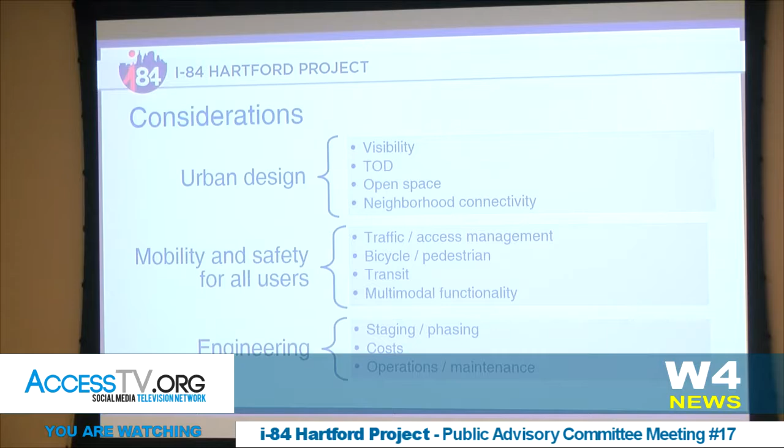So I'm going to invite the panel to come up now - David, Bill, Gina as well. Our panel is David Spillane coming up here from Goody Clancy. He's on the DOT team, our lead urban designer. Bill Kenworthy behind him from HOK is urban designer for the city of Hartford. And then Gina from TranSystems is the lead transportation planner on the station effort. So David, do we have those mics?

David, I'm going to let you explain some of the urban design considerations we've used to evaluate these stations. So as we're thinking about the station, there were really 4 urban design considerations. The first spoke to visibility - that the station was located in a place that was prominent, visible from major public streets, emphasizing its importance and significance as an important transportation facility, with good access for the public. The second was the relationship between the station and transit-oriented development, which will be an important part of rebuilding the urban fabric in the project area that connects the two sides of the highway.

The third part really related to open space, and I think this is an important ingredient of what happens in this area, which we've talked relatively little about. It's one of the more likely uses for the land over the highway cap, which has significant constraints or cost implications in terms of building on that cap. So that's a likely use of the capped area.

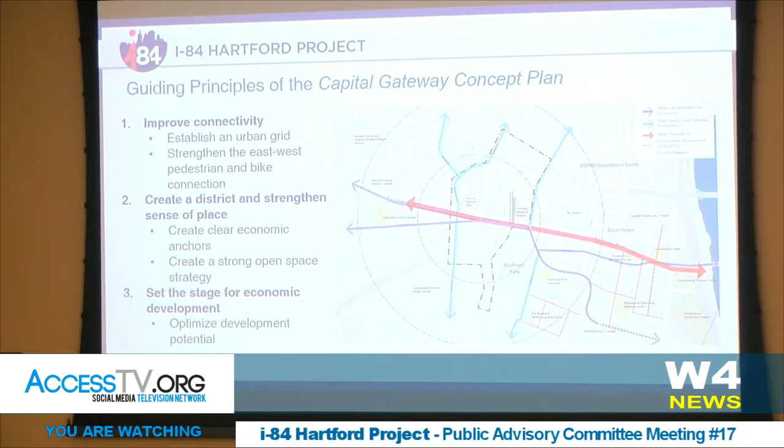Today the railroad comes underneath these I-84 ramps along Bushnell Park. Here's Union Station, just off Asylum, and the rail continues north under I-84. Here are the two sections of I-84 where westbound goes under Asylum and eastbound goes over Asylum, and the same thing at Broad Street. And here's Farmington coming into Asylum and Broad Street at the Trident intersection.

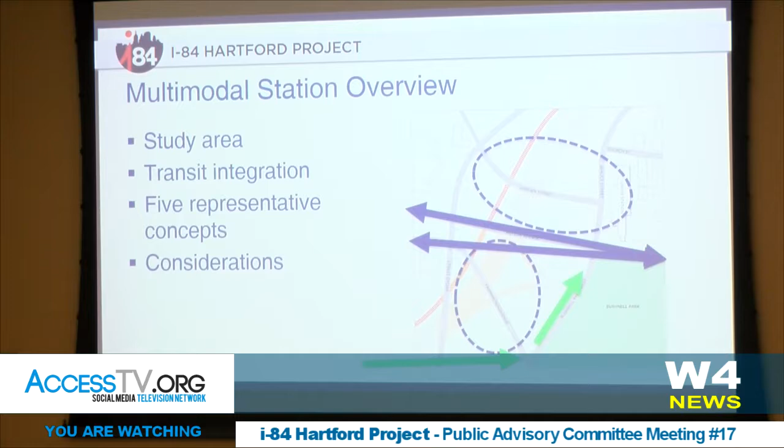There's also very high ridership on local bus routes from west to east, in particular on Farmington Avenue, but also up Asylum, and then there are other routes that go up to the northwest as well as north-south along Broad Street. So we're going to go through 5 representative concepts, 2 south and 3 north, and I'm going to use the panel to touch on those different considerations we explained a couple slides ago.

So our first southern concept, Concept J, is actually one that was recommended by a PAC member and Bill McCauley as well, who's in attendance today.

It would feature a rail station at the corner of Broad, that Farmington extension, and Asylum, a bus facility located essentially on the highway cap, parallel with Farmington extension, structured parking adjacent to Broad Street between Broad and that Farmington extension on a cap over the highway. And we're illustrating a kiss and ride or drop-off location, which would be accessed off of either Farmington Extension or potentially Broad Street. So I'm going to bring in an artistic rendering here and ask David Spillane to talk a little bit about how he sees this fitting into the urban context.

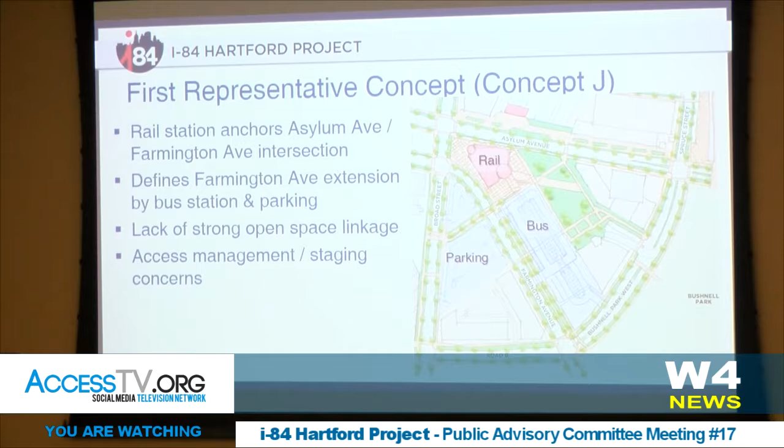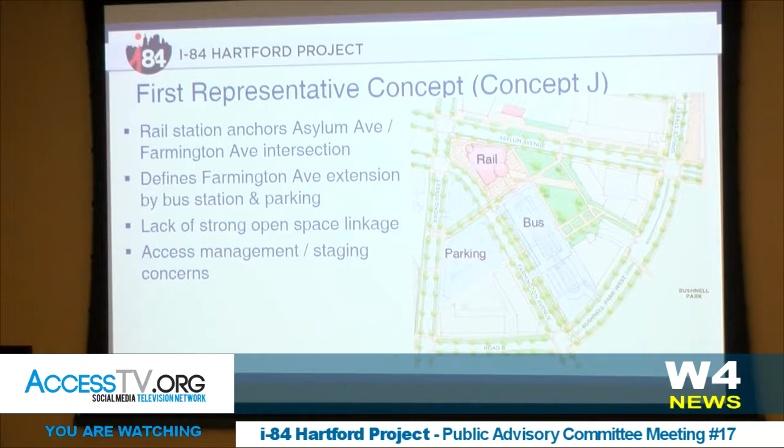Casey calls this the artistic rendering. What I call Casey's drawing is the X-ray, because it's just showing the infrastructure. I think the success of this ultimately is tied to creating a real place over the highway that connects the two sides, made up of the critical pieces of transit infrastructure — the station, the bus station, parking, kiss and ride, and all those other pieces — plus open space, plus urban fabric, buildings with people and activities. So the artistic rendering includes those pieces as well.

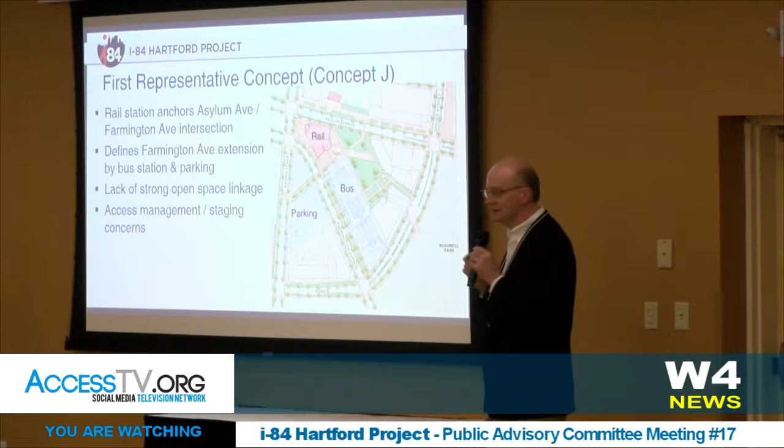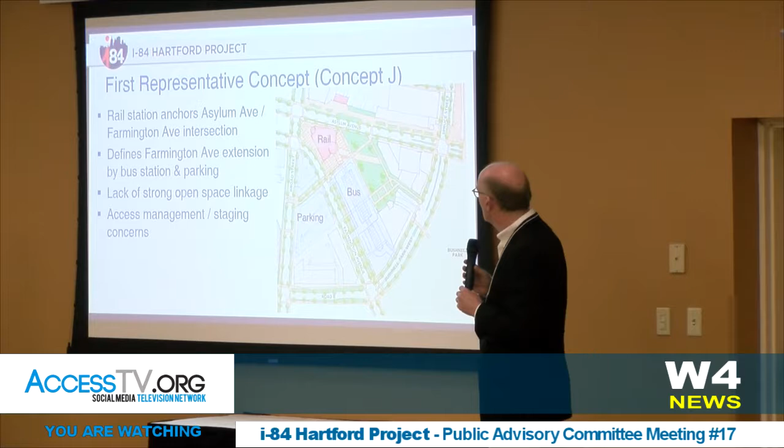So just a couple of observations on this, and I'm going to comment on some of this, and I think Bill's going to comment on pieces of this as well. So what you see here is, as Casey said, the rail station anchors the corner of Asylum and the Farmington extension, and that creates a pretty strong corner. I think it meets the criteria we talked about in terms of good visibility at a very important city intersection.

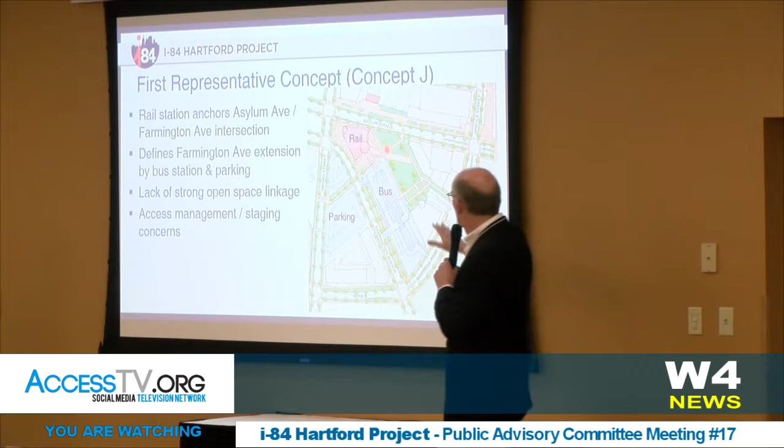In terms of open space, in this one we're showing open space adjacent to the building. Probably not the best location for it, as it's not well connected to many of the things around it. So that might not get quite the level of use or activity we might hope for.

Asylum Avenue in this one, I think, works really nicely. What we've got on the north side are new buildings. The station becomes an important part of the street, and all of the kiss and ride and other access functions are really pulled off onto some of the other streets. So Asylum works pretty well.

Concerns from me on this one, from an urban design perspective, would be that Farmington Avenue extension, because what we get on that street is a street that at the corner with Broad has the rail station, but then you've got the bus station behind that, and we've got parking on the other side of the street. So what we've got on the Farmington extension, where I think the vision and ambition for that is that it's a gracious street that extends the Farmington corridor into the heart of downtown — I think a lot of the things in this option that are on that street are really sort of support infrastructure. If you can imagine Spruce today, a lot of those activities in this version are coming onto Farmington.

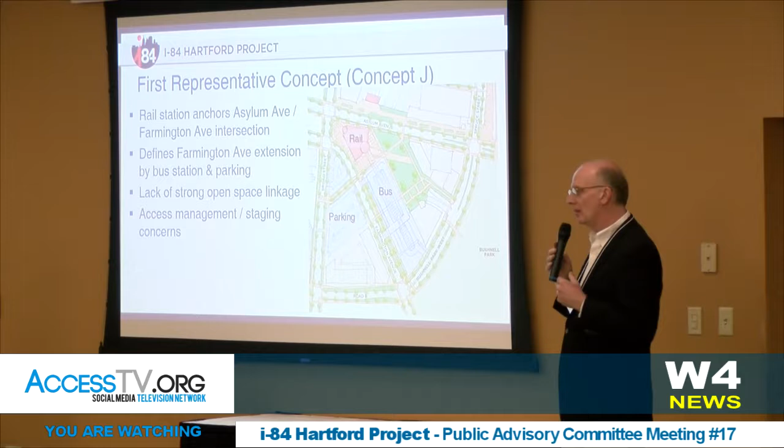In a similar way, I think Broad, which is such an important connection across the corridor, is a street that really becomes defined largely by a parking structure, kiss and ride, and other things. So I think ultimately what we get here is not a great street on Broad, not a great street on Farmington. Asylum works really well.

Thanks, David. Gina, can you tell us a little bit how you see this working from a transit perspective?

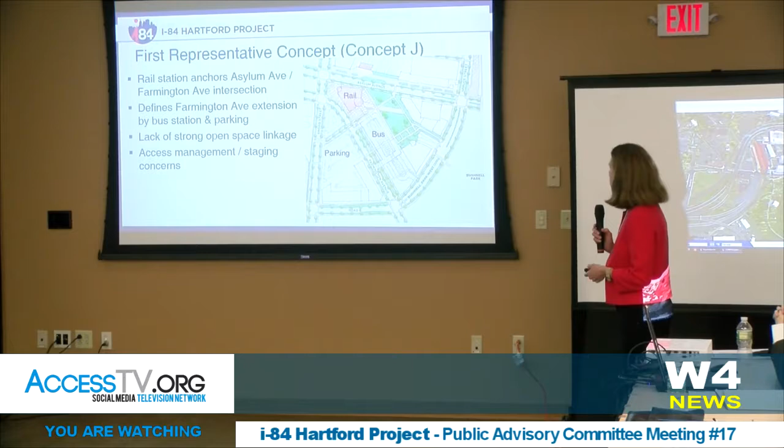From a transit perspective, this would work well because in some parts the rail and bus are in proximity to each other—you would just be crossing at grade to get from one facility to the other. Bus passengers would also use the rail station for waiting area, vendor space, and crossing to the parking lot, also done at grade.

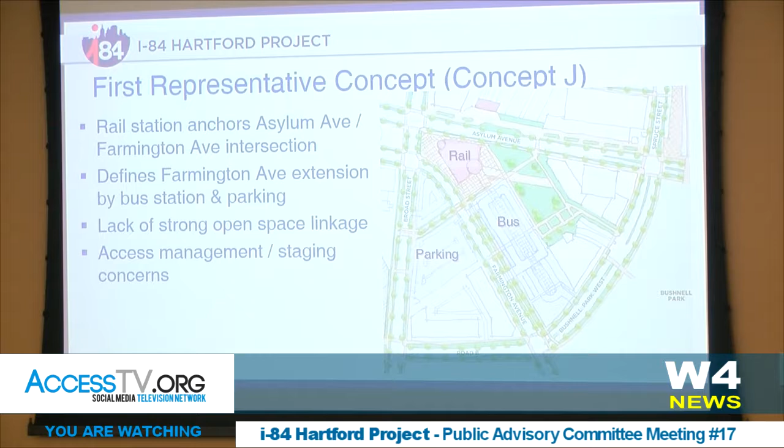To get to the north side of Asylum, which you may want to do to catch a local bus, we could possibly build a concourse level below grade to make some connections. From a passenger loading perspective, the two south options have some drawbacks because the station is on the south end of the platform, meaning passengers would load at one end rather than distributing along the platform, which is more ideal, with the rail station more in the middle.

Thank you, Gina. And Bill, from your perspective, what are you seeing with Concept J?

From an economic development standpoint, we began looking at some key sites on Spruce and Asylum, down lower on the south side of Asylum, and Bushnell Park West. There's an opportunity here, which isn't really an opportunity in this plan because of the location of the bus infrastructure, and then one down here on Broad. So those are just some things to consider with this plan.

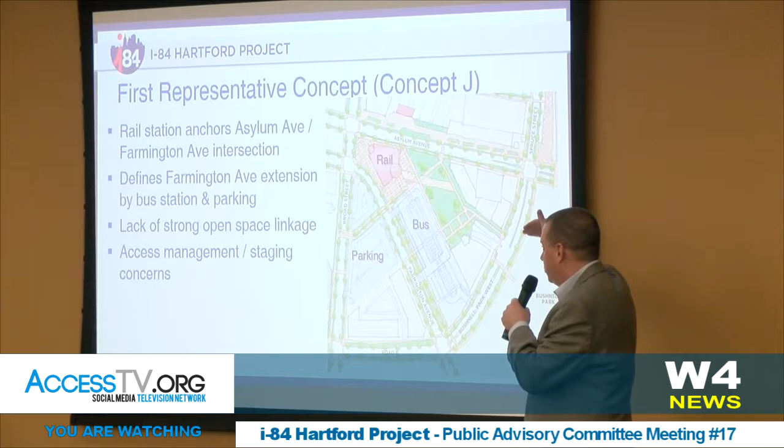The great addresses could be on Spruce and Bushnell Park West, facing the park, in terms of the considerations and how we get active frontages on those streets as well as the open spaces surrounding it. We'll be touching on those criteria as we walk through each of these versions.

One concern we see with locating these facilities south of Asylum is that access for both parking and buses would be off one of these major streets—it would have to be off Broad, Farmington, or even Asylum. That's something we'd like to avoid.

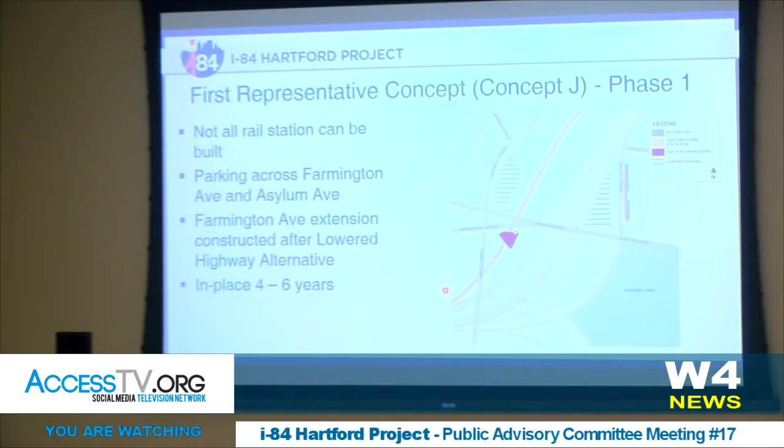There are also some staging or phasing concerns. Let me bring up a map to illustrate this. What you're looking at here is what we're calling phase one—we've relocated the railroad, but the existing highway network and ramps are still in the same locations. Ultimately, the Farmington extension can't be built to the very end of the project after we've already lowered the highway, so we'd need a temporary station, and it would be difficult to provide any parking for it.

I know that's probably an unpopular take, but we do need to provide some parking. The only opportunity we see is to use this lot currently owned by Hartford, which we'd need to acquire to construct the railroad, and use that for temporary parking—and of course, that temporary is really 4 to 6 years.

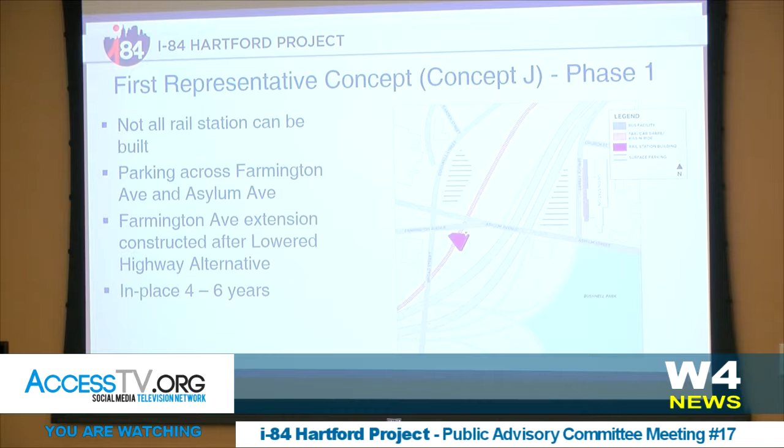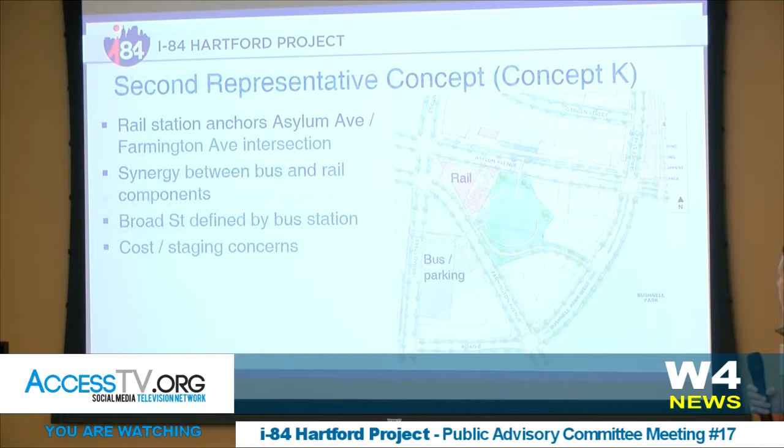So now I'm going to move to a northern concept, concept E1. We're going to show basically three different versions of concept E, and the differences are really in where we locate the bus and the parking facilities.

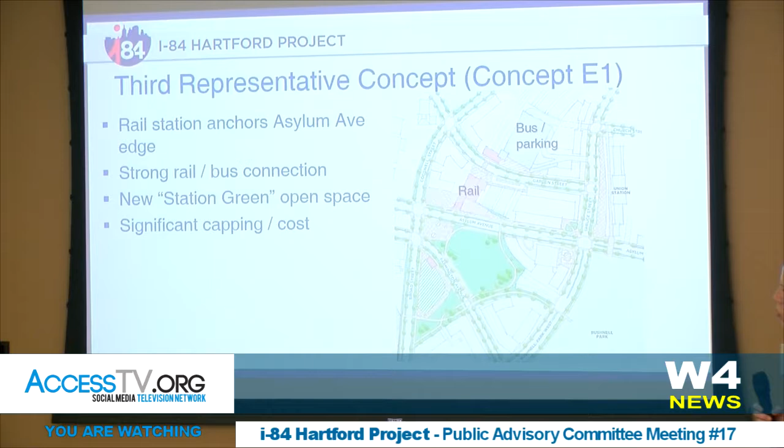So I'm going to start with David on this one, if you want to touch on some of the urban design aspects here. So, you know, this one, we have the rail station here on Asylum, coming out to the edge of the street, and we've studied views up and down Asylum. If you go right back up Asylum, a building that came out to the edge of the street, if the building beside it was slightly set back, could really terminate a long vista along Asylum, just as the Congregational Church does at the other end. So in terms of visibility, I think we've got some strong visibility here.

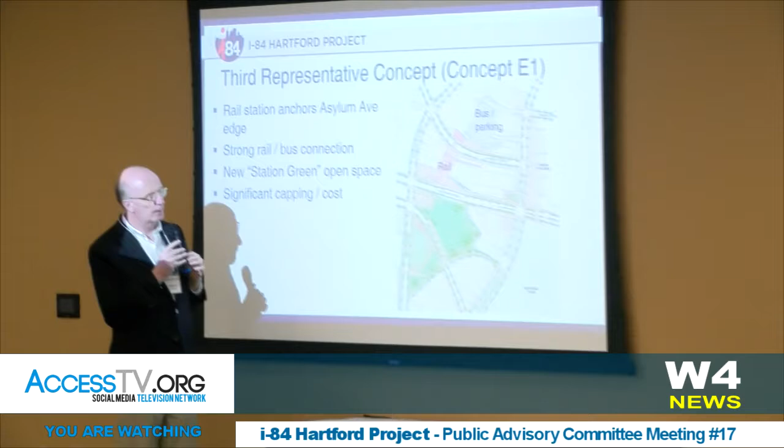In this case, Asylum and Farmington are really terminating in an open space here, which, as I said, might not be an open space like Bushnell Park. It could be something that accommodated active recreation. It could even potentially have some lower buildings, pavilions that activated the park. But this, in effect, becomes the station square as a space that's shared between commuters, surrounding neighborhoods, and the corporate communities that are here, and becomes a gateway from the downtown to the neighborhoods and vice versa.

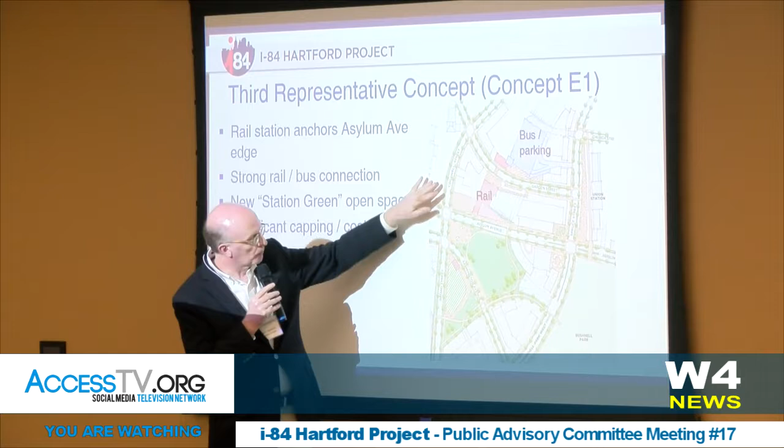Looking at the streets, I think one of the things we get is a nice transition along Cogswell to Broad, which is really a connection along the edge of a park. Farmington again connects through a park space as a gracious street, as is Asylum. In this case, most of the functions for the bus and rail station drop-off pickup are on Garden, but because of the configuration of the street, we're able to include them in a more compact way than we were on this much longer Farmington connection. So in this case, I think there's a pretty good relationship between development and open space and the train station in ways that each of them reinforces the other.

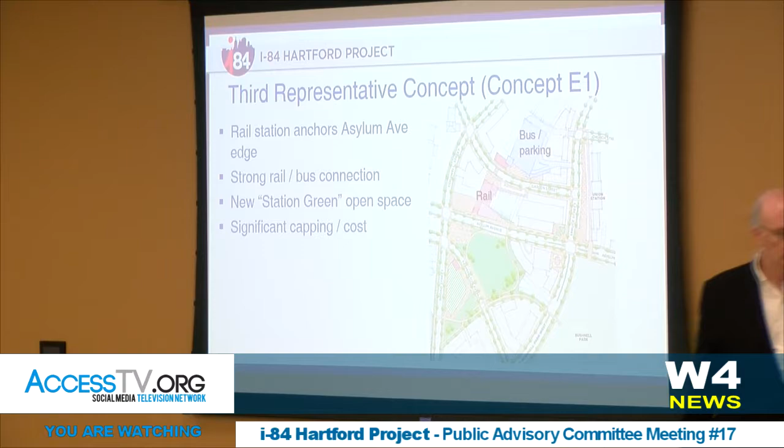Thanks, David. Gina, do you want to touch on the transit? From my perspective, E1 really works well from a multimodal connectivity practice. Rail and bus are relatively in close proximity. You could either cross at grade on Garden, or you could possibly build a concourse level. The platform level is lower level, and you could have a concourse in between the at-grade and the platform level to have some connections on that concourse level between the bus and the parking.

The drawback here, though, is it does require a cap. The cap is very costly, and we also don't have a really good read on whether or not there are security or safety concerns building over a highway. So those are considerations that we are still thinking about, but the cost implications render this one maybe not as feasible as we would like.

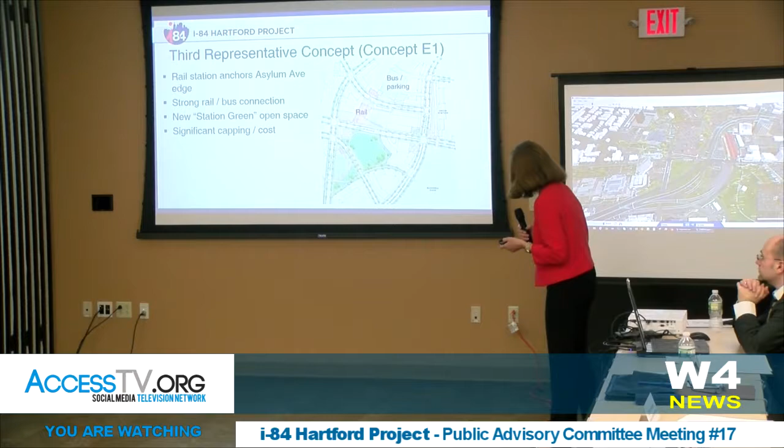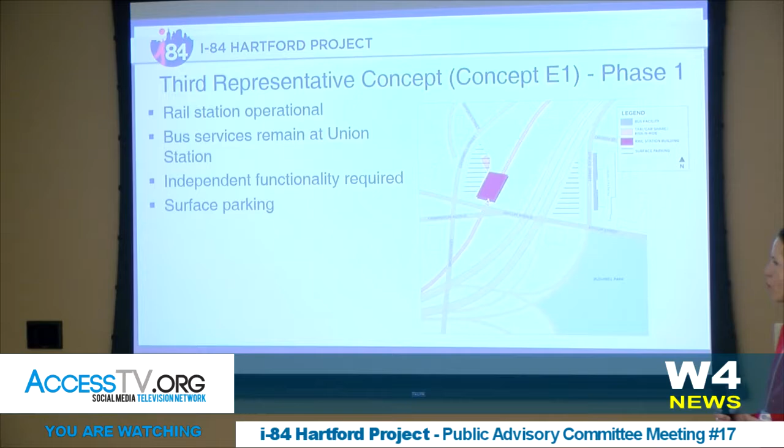Thanks, Gina. In terms of the phasing, we actually see the northern concept functioning a little bit better during phase one, where the rail station would fit in nicely with where we are able to provide that parking access further up off Cogswell Street, taking some of the burden off the Trident area. So we do see that working better. And just to confirm for everybody, the bus activity would likely remain at Union Station until the bus facility is constructed, which for each of these concepts ends up being late in the construction process.

So Gina had touched on the capping north of Garden and the potential cost implications. So the second version of Concept E2, we looked at shifting the bus and parking facility into this piece of land bounded by Garden and Spruce Streets and the lowered highway I-84. And then same kind of idea with the kiss and ride.

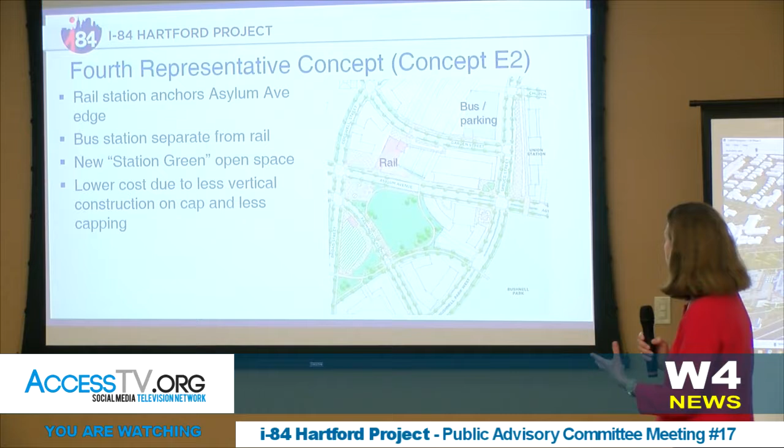So Gina, how do you think that works in terms of transit? Well, in this concept, the bus is really acting similar to what it would be doing now in terms of being very proximate to Union Station. However, from best practices and what we've heard from the public, we really feel that the bus and rail should be pulled as close together as possible. So for this concept, it would not really support that multimodal functionality.

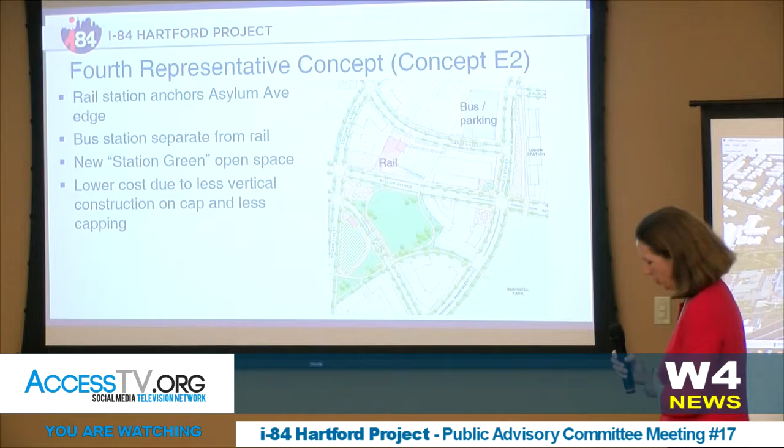Thanks. Bill, do you want to? Sure. So the big difference for the economic development in the streetscape is you're obviously taking what was a developable frontage across from what the repurposed Union Station could be and relocating the bus station to that area. Now, that doesn't mean there couldn't be active things happening near the ground floor to keep that experience of a higher quality, but it's just something to consider in terms of what's fronting on what the repurposed Union Station might be going forward in the future.

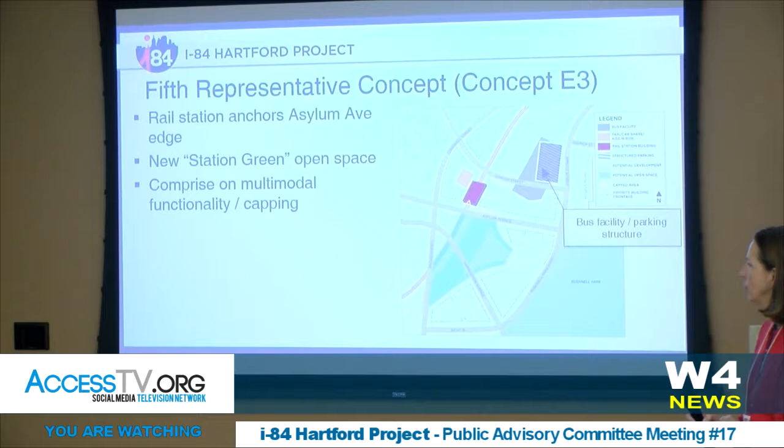Thanks, Bill. So ultimately, what we then tried to do is take those two concept E's and try and balance the cost implications, the need for capping, and also try and create a little bit better multimodal functionality. And so the way we did that was we took our E2, which of course has the bus facility located in this parcel next to Spruce and Garden, but we've now shifted the bus closer to the rail station by bringing it underneath Garden Street. So this is below Garden Street, essentially constructed where that parking lot is today for Union Station. We would excavate a little bit down to allow Garden Street to come over.

And again, the same general concept for the kiss and ride. Gina, do you want to talk a little bit about how that affects the multimodal functionality?

This is a pretty good compromise, especially if there is a cap, which will be shown in the next slide between Asylum and Garden, and we can talk about that in a little bit. But this at least brings the bus and the rail closer together. It lowers the bus facility to below grade, but yet has access off of Spruce Street because of the hills and the grade. So the buses can operate pretty efficiently coming in and out of the bus facility, as well as the parking vehicles for the parking lot.

It does provide a connectivity between the rail and bus that we could actually have as climate controlled. You see that blue, that would be representing some type of a pedestrian walkway between the bus and the rail. And you could bring actually passengers from the rail to the bus facility through an underground tunnel possibly, or some type of a concourse also. So there would be some connectivity.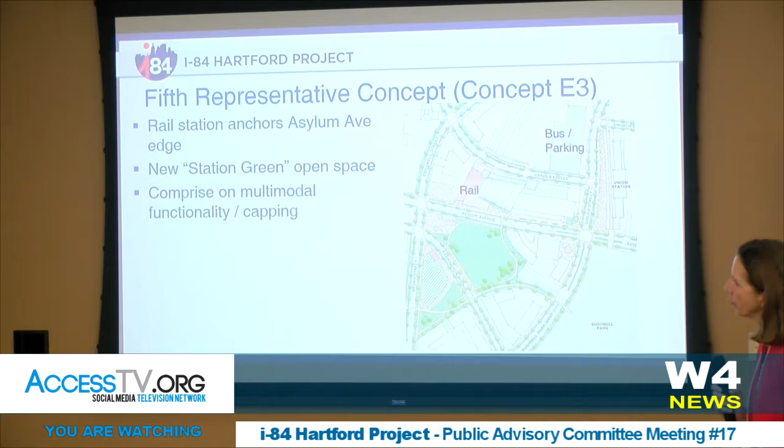Thanks, Gina. David, do you want to touch on some of your thoughts? Yeah, I mean, I think this one is really very similar to the one that Bill previously described. I think the real difference is only the ability to get passengers between the bus and rail functions internally without going out on the streets. That's the primary difference. From an urban design perspective, I think they are essentially the same.

Thanks, David. So I'm going to advance one more, and Gina had referenced this idea of potentially capping this area between Garden and Asylum, and it is something the city's expressed a real interest in. So I'll let Bill give his thoughts here on this image.

Sure, and the concern and consideration is the relationship of this open space to the new train station, as well as the development that sits up across from it, and the experience walking down Garden Street, and making sure that whatever happens in here doesn't feel like it's a hole in the ground with a lot of noise coming out of it. So the goal here would be not necessarily in an intensively planted way, but maybe there's a way to get a structure that can still be active.

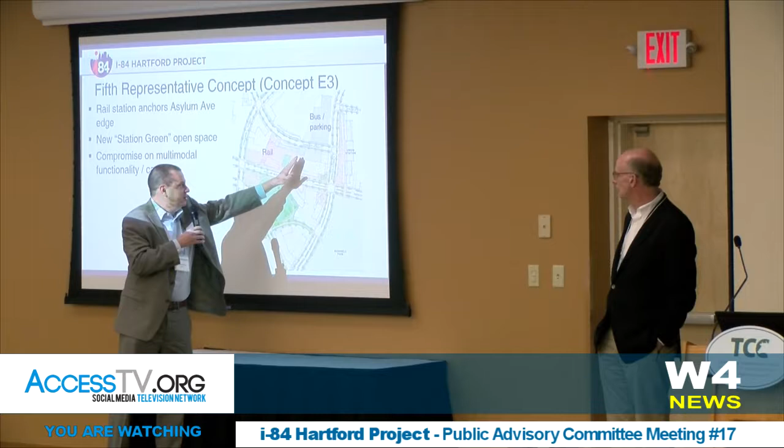I'm still concerned about the size, and I think David shares my concern about the size of this space. This is about an acre worth of space over the highway, 200 by 200. But it creates an opportunity to be a new open space heart in what could be a new commercial district related to the rail station, and to provide mitigation against what otherwise would be an opening down into the highway.

Thanks, Bill. So ultimately, I think the conclusion here is based on a lot of those different factors we explained that generally favored the northern sites.

We've worked to create this concept E3 that we feel best represents a compromise between potential construction costs versus the multimodal functionality, and we're here today to recommend this concept. We do feel that E3 best satisfies the criteria, has all those advantages shared with the northern concepts, and then has that balance.

We're hoping that the next steps from here would be to advance the design of that station to what we call about a 15% architectural level, which we'd wrap up right about when the EIS process concludes. So we did want to pause for Q&A here. If one of you guys could be a runner for the microphone if we need one.

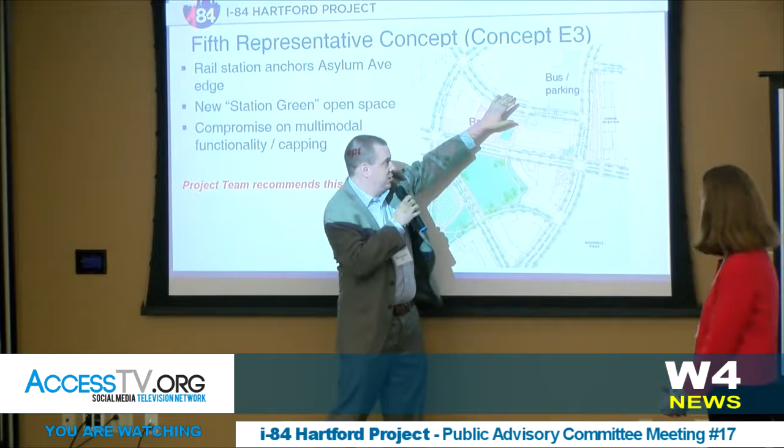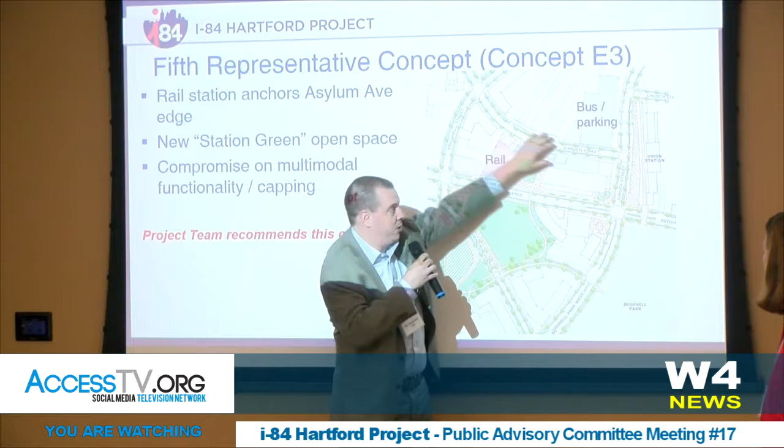And the idea is that it's a pedestrian bike street that happens to have vehicular access into the station, and that this is going to look and feel like a city street. There are some frontages that are a little tougher with the bus station, and the idea would be we try to activate those frontages to the degree we can at the ground floors, which is the most critical part, to make sure you have as seamless an experience as possible coming down through here. That's the goal.

And to Tony's point about open space, I'm the biggest advocate in the room for making sure we manage and control and have properly scaled open space. So there's certainly some concerns about being able to fit a Bryant Park-sized facility within this green space. And I don't know that it has to be as green as we're showing either. I think it's about really creating a great program that's seasonal, that allows it to be active a lot of the year. I don't think we want to create another Bushnell Park because you've got a great Metropolitan Park right on the other side of this development.

This open space wants to be a different kind of setting, more courtyard-like, maybe harder paved than green. Not that you can't have trees, but the idea is that it's got more different types of uses happening, helping it be an active space year-round, 12 months of the year.

Yeah, I would completely agree with that. And I think in terms of open space, where we would be is at the beginning of the conversation about how to really make that something valuable. I think that Providence went through a similar process with similar circumstances when they created WaterPlace Park, as part of a major new development as they moved rivers and highways. And that's adjacent to large areas of open space and parkland around the state capitol building as well. So I think it will take a lot of work going forward to fully define that.

I think there are possibly interesting connections from the YMCA there in terms of programs. I think it's a place that we could think about playgrounds, bowl courts, all kinds of other things that really made this a valuable community space, and a space that was used very differently from Bushnell Park, but it will require significantly more attention going forward. But I think there are really very great opportunities there.

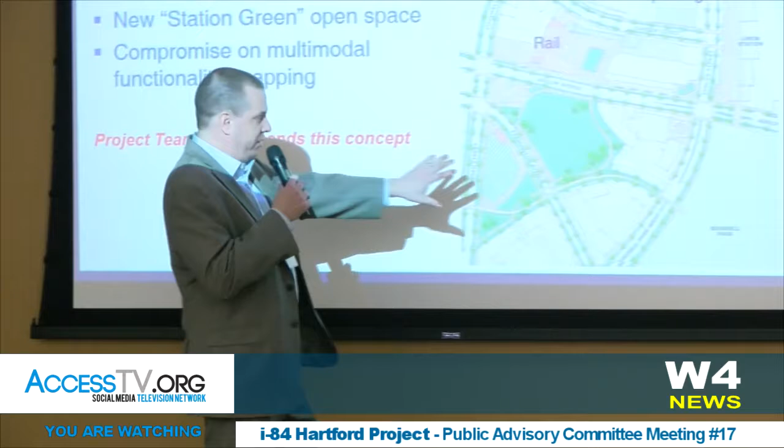Well, Bill just took my first thought. I would definitely agree. I think it's been generally accepted in the room here that private development is not going to occur over the highway because of the additional cost of the increase in size and the cap itself. So I strongly agree that it would be much better to have green space capped on top of the highway and hide the impact through this stretch than anything else. Most in this room know that's what I've been pushing for from day one on this project. So that being said, I am encouraged, as I've said many times, to see the cap along this section and to see the green space there.

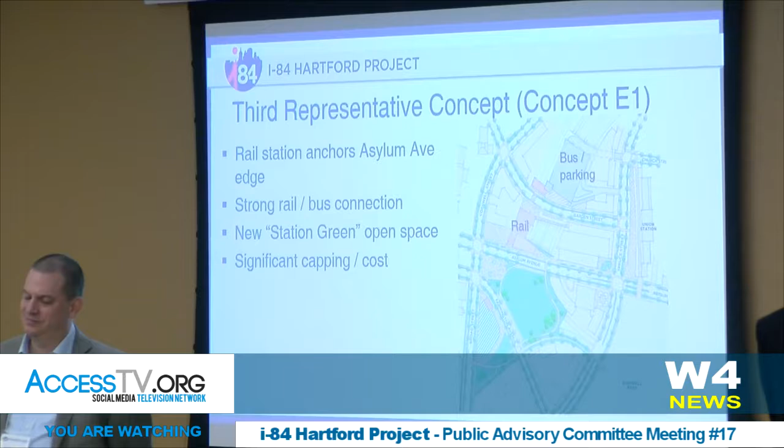Along those lines, and knowing that we're not going to get private development on top of the structure, I would strongly encourage the reconsideration of concept E1. One of the main goals of this project has been explained to me as reducing traffic congestion through this area. One of the most cost-effective ways to reduce vehicle traffic congestion on highways is to get people into public transportation. And it was pointed out that the best way to get people using public transportation is to make it easy and convenient. To separate the bus and the rail - on this drawing it doesn't seem like a long distance, but I know many will use that as an excuse - whereas E1 really pulls together the bus and the rail use. Many in my neighborhood will use the bus as the beginning and end of their commute. They'll take the bus to the train station and take the train to work, then do the opposite. So I would encourage reconsidering the concept of E1, recognizing there are other cost benefits by putting those structures together.

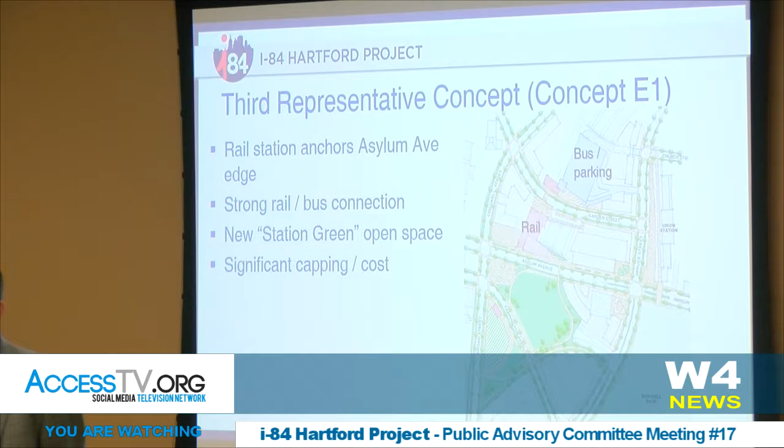I also am discouraged about E3 by the fact that we're eating up yet another prime piece of real estate in the heart of downtown with the use of a parking garage, where a parking garage over the highway is a great use of that space that would otherwise be wasted.

Thanks, Aaron. I just wanted to confirm one thing on the bus access to the station.

So while we label this as the bus facility, that's really primarily an intercity bus facility, your Greyhounds, your Peter Pans. I'll talk more about that in the CTfastrak part of the presentation. But we envision that the local bus routes that today take Farmington and Asylum, and potentially CTfastrak routes as well, would still have stops right in the vicinity of the train station. So if you were taking a local bus to the train station, it wouldn't necessarily take you to this bus facility.

I kind of agree with Aaron as far as E1 is concerned, and I like the idea of the green space. I think Bill McCarsky, from even before this project began, has talked about the view from the little girl and the hands across to the state capitol. This green space makes sure that nothing obstructive is going to be there.

If you do E3, could you talk more about the tunnel? Because I would be fearful that it would turn out to be a narrow, scary, unattractive, hard to keep clean space. What do you think you might do to make it beautiful, appealing, and comfortable to walk through?

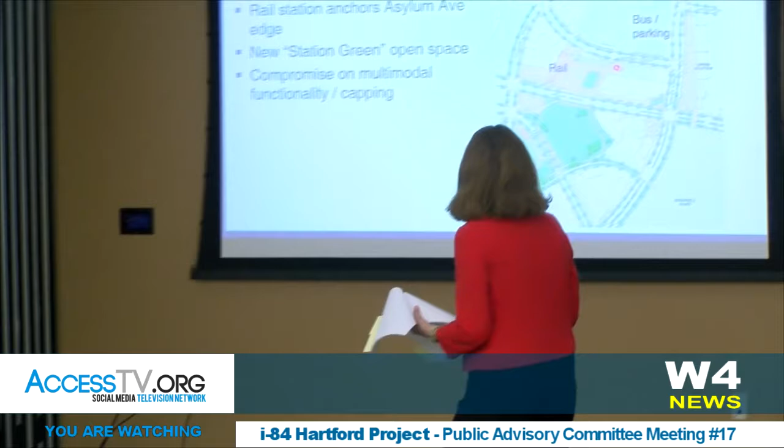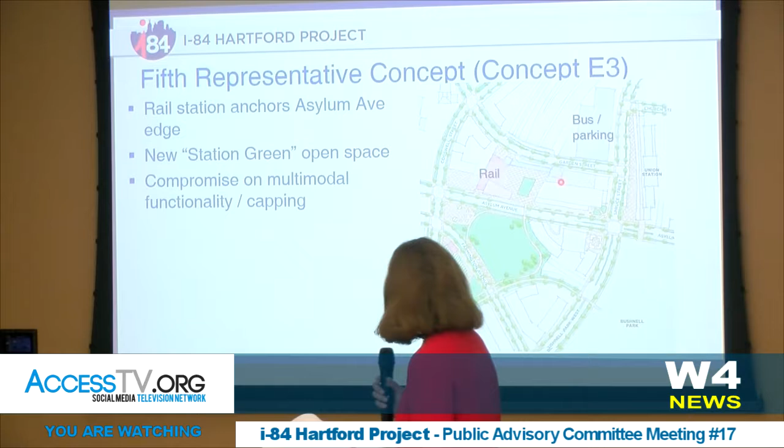So I think you're referring to this potential passageway underneath Garden Street here, between the rail and the bus? That would not be a tunnel, what we're showing there. I had mentioned that there could be a concourse connection, a tunnel type connection also below grade. Actually, what we're showing there is an at-grade crossing, just climate controlled. So it could be part of a building, it could be part of a glass enclosed structure, or actually just a walkway with a covering, truthfully. We just want some type of climate controlled facility connecting the rail and the bus.

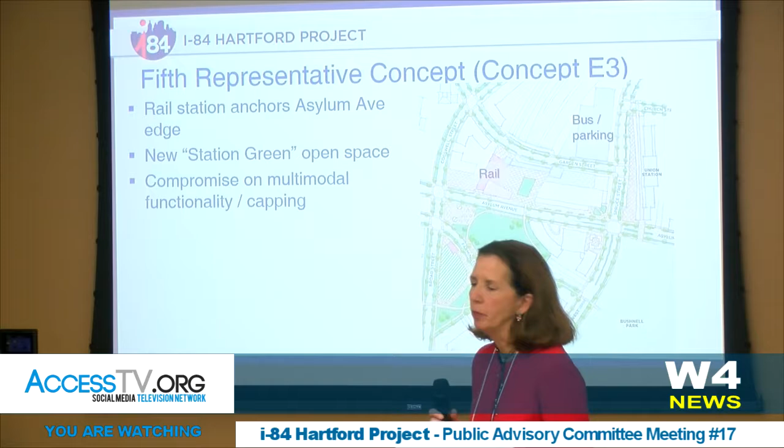There's also other options to connect if you wanted to go below grade and make a connection there, but I understand your concerns with having something that's not secure. And to the issues you raised, it's a walk uphill from that bus station. So in January, you want a place that has climate control, but Garden should still be a great street, so in the summertime you can walk up and down the hill. We want to keep the street traffic alive too, a little over 200, 225 feet, and have it an active street also. We haven't designed it yet, I'm not quite sure, but we've tossed around a few different ideas.

Thank you for your patience. It always takes me a while to get these.

Can you explain to me a little bit more about which buses are going to be in the bus facility there? And is Spruce Street going to be widened? And where are the city buses going to be?

The only routes pulling into the facility would be the same routes that pull into Union Station today. There are 5 local bus routes that end at Union Station, and those are the 5 we're assuming would pull into the new facility. The bus routes that continue on Asylum and Farmington would still be routed the same way, so you would make connections on the street. If they go down Spruce Street now, they would again. Correct. Any buses that don't currently pull into Union Station, I have those numbers and can share them with you afterwards.

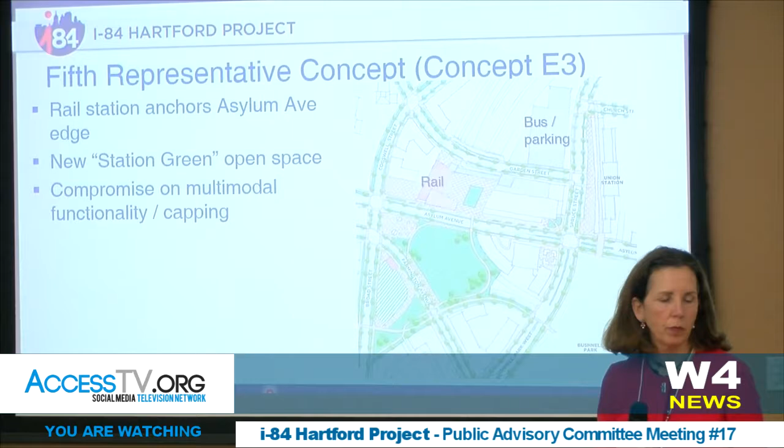But is Spruce Street going to be widened? I'm not aware of Spruce Street being widened, I'd have to look at Nick. We did consider whether there might be a need for a turn lane to serve Garden Street, but I don't know if that's fully resolved. Just remember, these diagrams don't show lane lines. There's more engineering that goes into the intersection design. This is really just a conceptual view of the overall area, but we have other drawings with more detail for some of the lanes.

Okay, because I was just on, there are sometimes a lot of buses at the same time in the same place. Last week from between Union and as far up the hill, I could see there were 17 buses. A lot of those are probably intercity buses, Peter Pan, Fast Track. The week before that I was on Spruce Street making the turn on Church Street with 6 buses. So they take up a lot of room and they really don't make it easy.

Well, the intercity buses would definitely be pulling into the facility, and then the 5 local buses would be pulling into the facility. So they wouldn't be staged on Spruce Street as you see them now. Right, so they would be pulling into the facility instead, off the street.

Would that be the end of the route, or would they still go downtown? If they end at Union Station now and turn around, then they would. If not, they would continue their normal routing. But they would pull into the station to keep going? Only the 5 that currently do now.

Is that the ones on Union Place? Correct, yeah, so I can give you those numbers. Those buses go to downtown, then terminate at Union Station, so they're the perfect buses to come into this bus facility, because they're already taking their layover at Union Station. Those are the only ones we're talking about that would pull in. When they start their return trip, they hit downtown, then they go out, whatever their schedule is. And the transit operations will be relooked at once this facility is being designed.

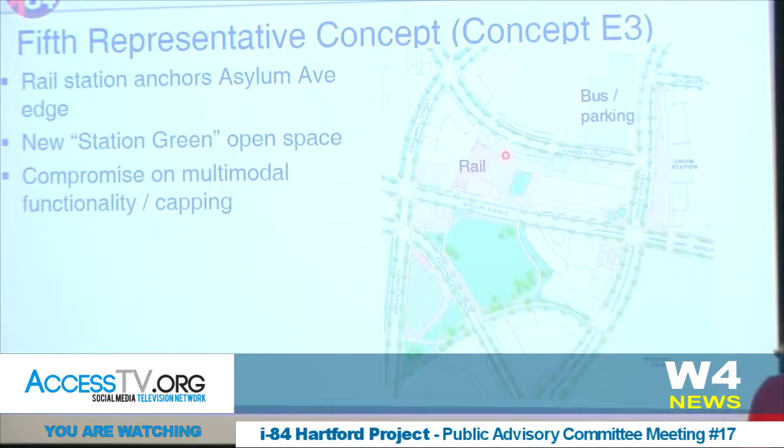I just remembered my other question, about the connection between the rail and the bus. If it's an uphill grade, is that okay for wheelchair or handicap access? It would be relatively flat, about 3%. Garden Street itself isn't too steep here, it really doesn't start to descend more steeply until after it crosses over the highway, so this part isn't actually as steep.

There are examples of how to create active frontages, office spaces, retail at the ground floor of garage structures, so I would think that's possible. I think it has to be worked through with the team going forward to make sure when the location is set that we have that as a performance criteria.

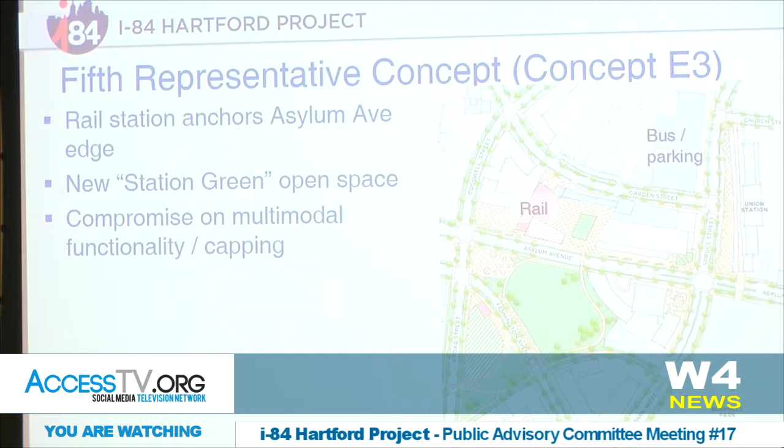So we've got some last questions. What's going to be on Garden Street to make it pedestrian friendly? We have not identified the full range of bicyclist and pedestrian accommodations. I would imagine it would include widened sidewalks, potentially bike lanes, and some street furniture, whether that's street trees or other types of amenities.

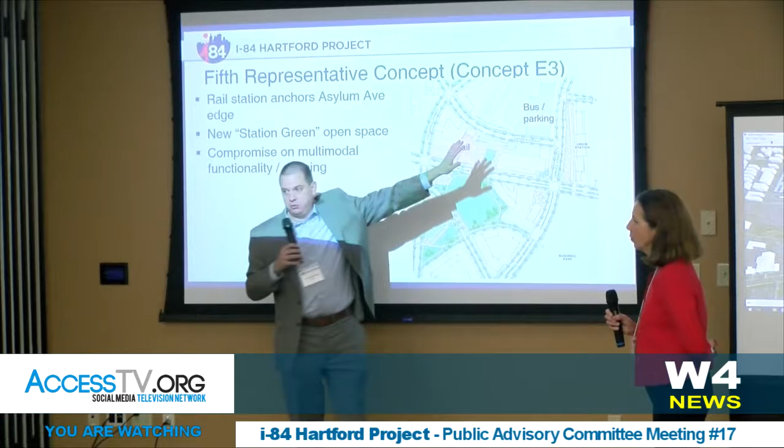The hope is that the development sites that front on it would have active frontage as well, so that this isn't a back street, it's a city street. The goal is to create as complete a street as we can for that access point coming down Asylum Hill to the new repurposed Union Station. It's a very important front door for Union Station from this side, the way it's considered now. Yes, exactly.

So I think what I heard was a couple folks mentioned E1. Maybe what we can propose is to advance these two northern concepts. One thing we'd like to do is get back to you on what exactly the cost difference is. We're still finalizing those cost estimates, but we think it could end up being a big number, which shapes part of our thinking in recommending E3. I didn't really hear any opposition to moving forward with a northern concept.

I just had one last one here, I'll just steal the microphone. I wanted to second the concept of E1 and getting that bus and parking over the cap. That seems like a good use of the cap and a better use of developable land we could keep free. Thanks, Tony. Yeah, so we'll pull forward both of those two concepts and get back to you on some of the cost differences.

Sorry, so thanks to that — is the cap next to the rail in E3 included? I heard you say it would be a great spot for a cap next to the rail, the green rectangle in it. Is that part of E3, or is it a possibility? I'd say it's a possibility being strongly recommended by the city, and as we conduct cost estimates for the two different scenarios, I think it's going to have to be part of the conversation moving forward.

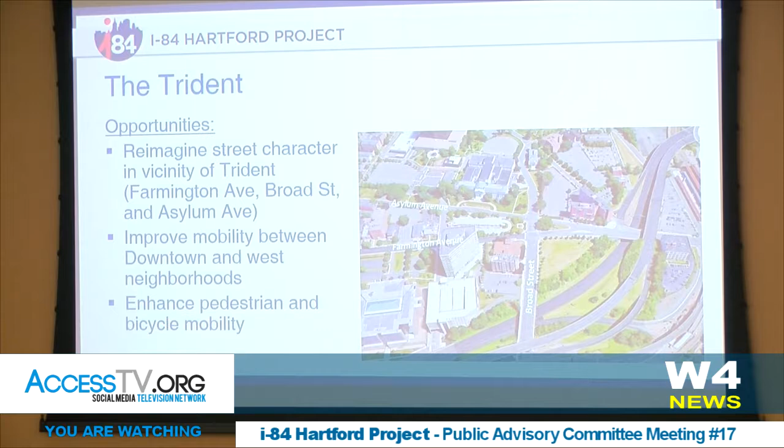So as you all know, today it does not operate well, and with the potential changes in travel patterns - one of the big drivers for travel patterns in the Trident today is access, particularly in the PM, to this eastbound on-ramp that comes from Broad Street. Ultimately, in the lowered highway alternative, that would be moved to that new road, kind of off the page here, that Road A, Bushnell Park West. So that does make the general travel patterns for people traversing the Trident change.

So we'd also like to ensure that not only does it operate well for vehicles, but that it needs to be a better bicyclist pedestrian corridor. And David Spillane, going back to the hub study, has always talked about the importance of bridging from Asylum Hill down to downtown with a strong pedestrian connection.

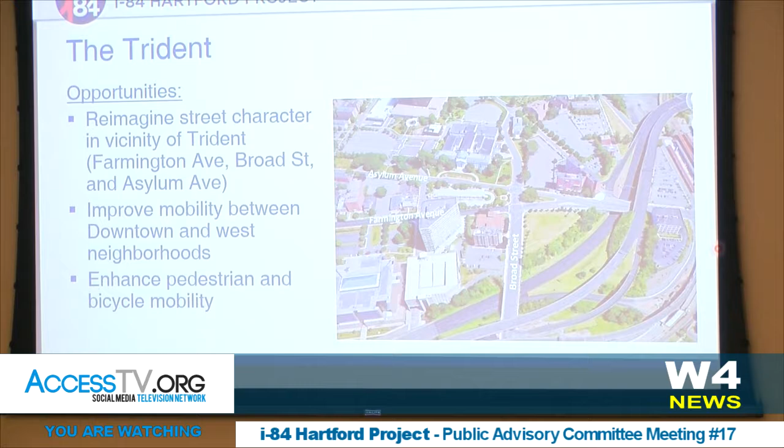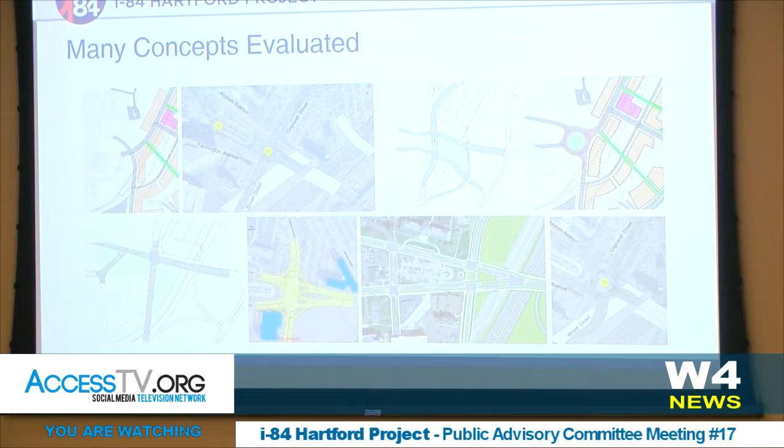So we've looked at a ton of concepts, literally. We talked a lot about that crazy octopus-like roundabout at the last meeting, and at that last November PAC meeting we went through these 4 concepts, including that roundabout. I think we all concluded at the time that roundabout was just not going to work - the complexity, the number of lanes, poor pedestrian environment. So we have taken that one off the table.

We also had that western shift alternative that would have moved the intersection of Farmington and Asylum about a block to the west. Ultimately, that would have impacted the DAS parking garage. As we're weighing these alternatives under NEPA, an extra building impact for one alternative ultimately couldn't be justified. And so we've removed the western shift, and that leaves us with our Farmington extension and the discontinuous Broad Street of the 4 concepts we presented last time.

Just to touch on the discontinuous Broad concept, this is the idea to cut off Broad Street for vehicles between Farmington and Asylum. There would still be a bicyclist-pedestrian connection through there. That would allow these three intersections to operate far more effectively and potentially allow us to have fewer travel lanes and help create a better bicyclist-pedestrian environment.

However, we understand the feedback has been very strong about the desire to keep Broad Street as a through movement. So with that in mind, we've kept this Farmington Avenue extension, which has been championed by the city and their consultant team. As this is a city street, we've been happy to adopt this. You saw it illustrated on those multimodal station graphics. It does keep Broad Street open.

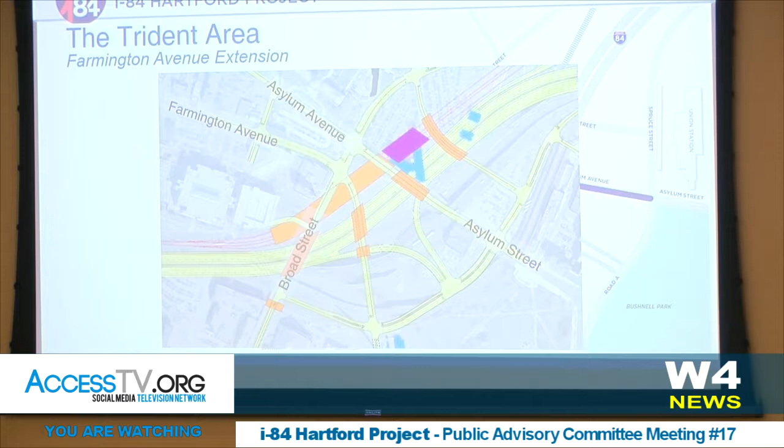But either way, we're continuing to look at these two options as we move forward, and we could potentially evaluate both options in the DEIS. So just to wrap that part up, we've adopted the Farmington extension, continuing to analyze both of these two concepts, and we envision a potential level 3 screening document that could filter out these Trident concepts prior to the DEIS.

Jackie: At night, when the Civic Center, what the XL Center, lets out, and when all the clubs close -- can you back up one?

There's a lot of traffic that goes up Asylum Hill. I'm assuming they're going Farmington, Asylum Avenue. So with the new Farmington Avenue extension, a lot of that traffic would take a left on Bushnell Park West to get to Asylum Avenue. Is that -- you know, I tend to think they'd come a little bit further up the hill.

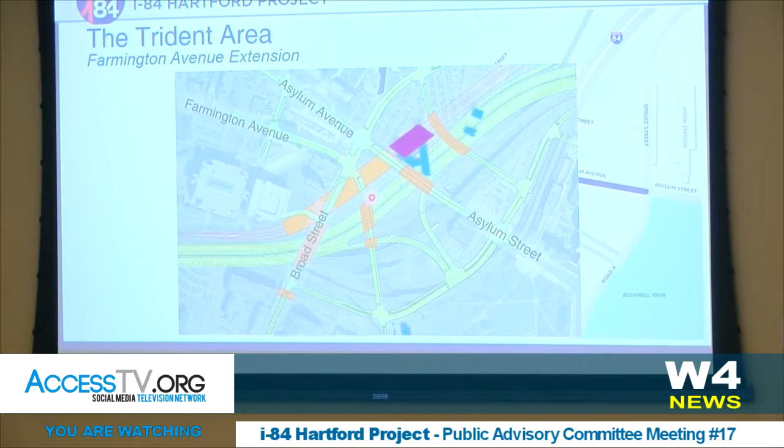From a travel distance perspective, it'd be a little shorter to either. Late at night, with not a lot of traffic, you'd probably use Broad Street. It would be relatively easy to make a left, and even if you had to, you could take a right on red. During peak conditions, it might be more likely to see people come up to Asylum Place -- that would be a little bit shorter as well. But that would also be an option to come down Bushnell Park West, although it would be the longest of those three scenarios.

But you bring up a good question. One of the things we're continuing to evaluate with this Farmington extension is how it fits travel patterns, and that's something we haven't fully concluded on, but certainly something we're still working on. Tony?

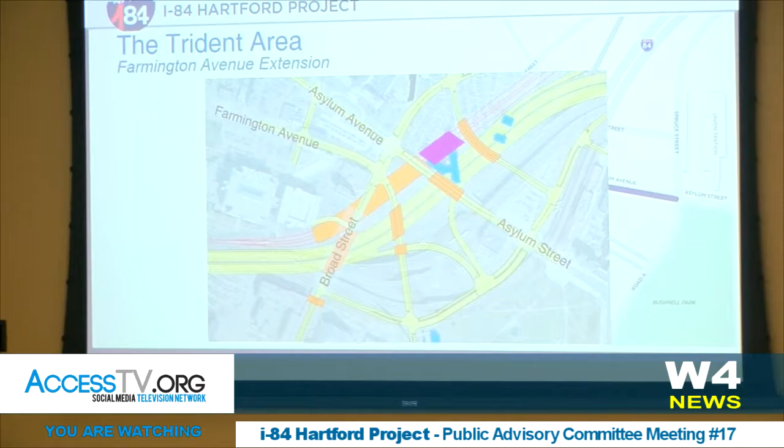Tony: People want to go on Asylum Street and will be coming back out of Asylum Street. With this Farmington Avenue extension, you're actually reinforcing another route to downtown that's also used a lot, which is Capitol Avenue -- particularly when the Bushnell lets out, it's on Capitol Avenue. I don't see why you wouldn't go right up Capitol Avenue to do the Farmington Avenue extension, if you wanted to go out Farmington Avenue, or you could go over to Asylum. But I think it's a mistake to assume that all the exiting downtown traffic is coming out of Asylum.

Sure, no, that's a fair question, and we do recognize the potential new travel route this offers, and we're certainly continuing to weigh that. I think we're continuing to evaluate those travel patterns. I don't think we've really locked anything in there yet.

Tony: Just in general, I like seeing new connections because it gives options during both peak travel times and other times. So any of the proposals for the Trident seem to be giving more options, rather than less, for how folks can get from one place to another in that area.

Thanks for your comment -- no, that's true. Okay, I will move along to CTfastrak.

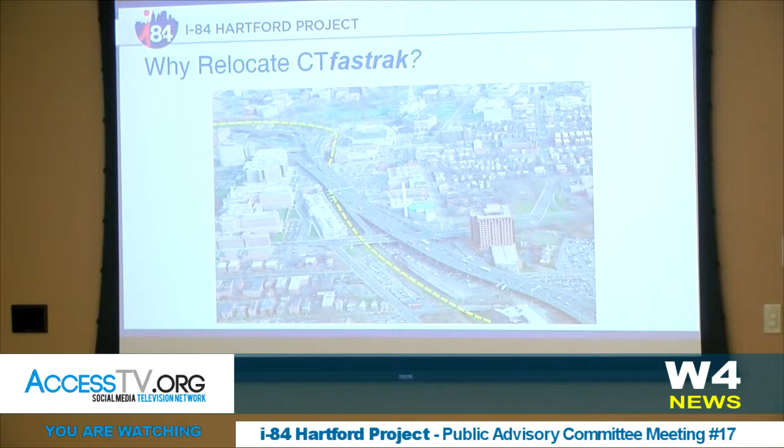So you may be asking, why are we talking about CTfastrak? For the same reason we talk about relocating the railroad, because CTfastrak follows that same corridor, crossing beneath the highway today. You're looking at a view looking east. Here's the Capitol, Bushnell Park. This yellow line denotes the railroad corridor, but CTfastrak parallels that all the way to Asylum. So I'm going to go to a plan view map of existing conditions.

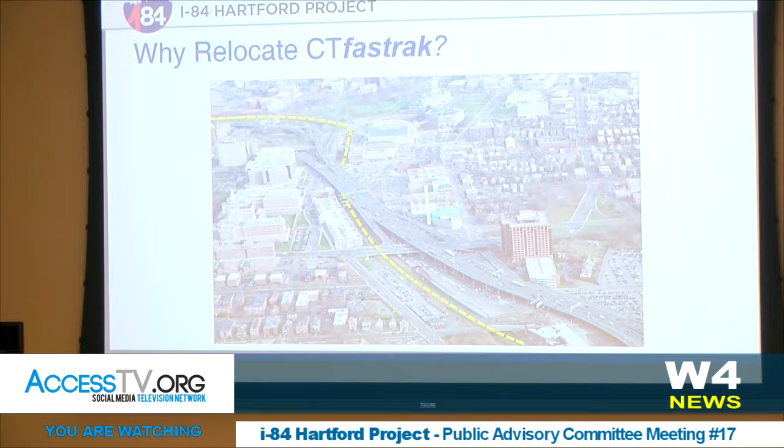Today CTfastrak, the guideway comes in from the Parkville station, has its Sigourney Street station, crosses at that skew underneath I-84, and really the guideway terminates at Asylum.

Early on in the process, we'd presented a concept for reconfiguring CTfastrak in conjunction with the lowered highway. Unlike the railroad, where we've eliminated the crossing, we would still like to see CTfastrak cross the highway and rail corridors to start to get folks toward the CBD. So this is the concept we presented a while ago.

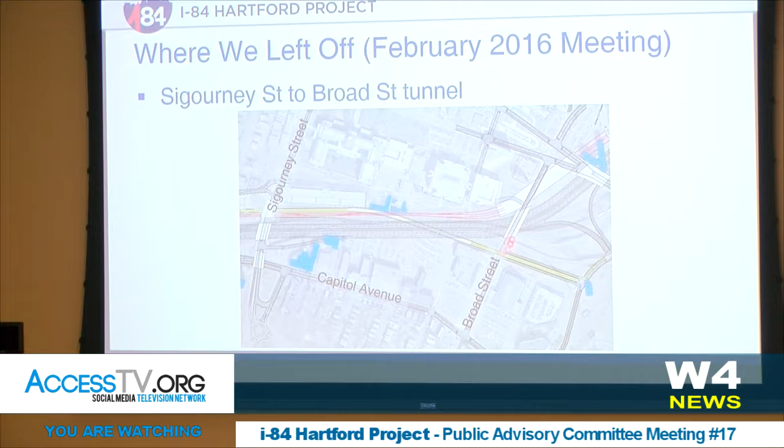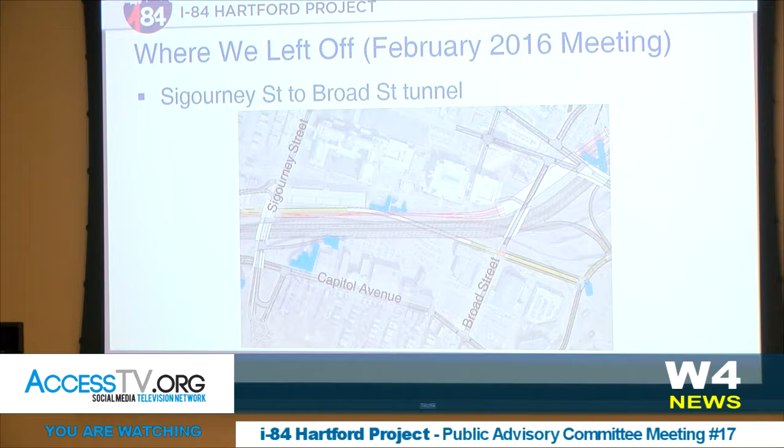I'm going to zoom in on this area in the vicinity of Sigourney Street to illustrate how we envision that crossing. Here's Sigourney Street. The gray here is the lowered highway alternative, the proposed highway, and here's Broad Street. So what would happen is the guideway would come in, here's the Sigourney Street station, would start to descend and be in this tunnel section beneath the railroad, beneath the highway, then come up around underneath Broad Street, starting to come up the grade, and then terminate at that Bushnell Park West Road where it would traverse left up towards Asylum. This was essentially our favorite concept early on in the process.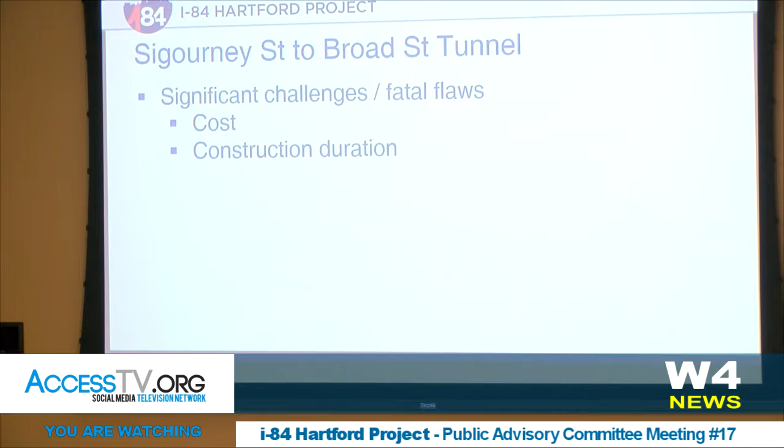About a year and a half ago, we conducted a cost estimate, and we estimated about $390 million prior to escalation, prior to contingency. In addition, we thought it would take about 4.5 years to construct. Very complex construction—we'd be building this basically underneath the existing viaduct, trying to keep it in place. So CTfastrak would be out of service for that extended period of time.

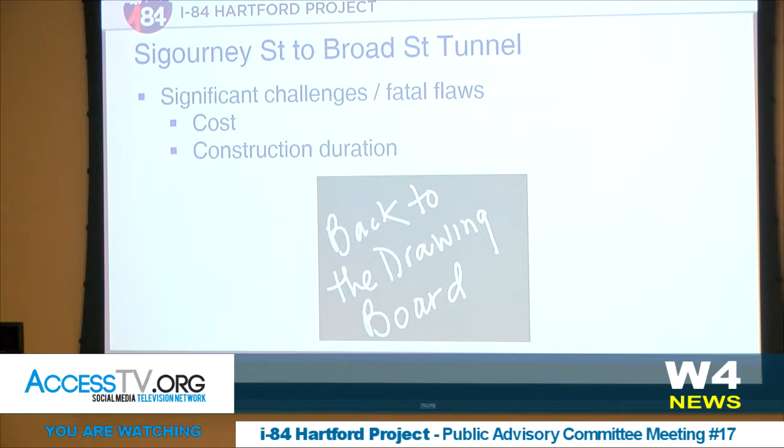So we have been back to the drawing board, and that's why we haven't really presented something to you till today where we feel like we've answered a lot of the questions on that. We developed many different ideas—we've now looked at 9 complete alternatives with many sub-alternatives to that.

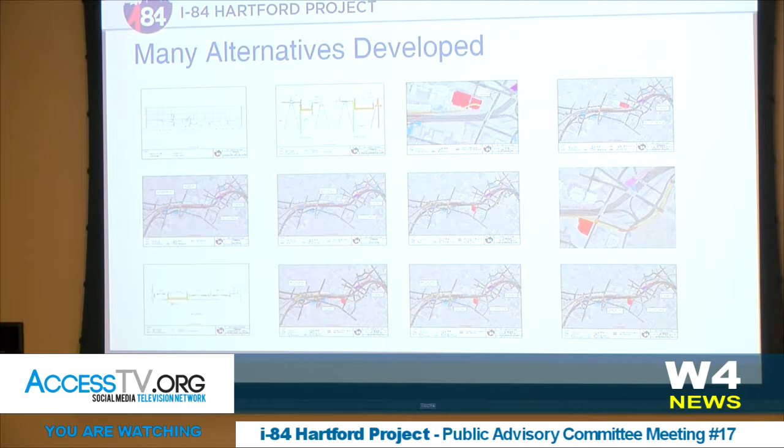Ultimately, as we've evaluated those, we've considered their ability to let CTfastrak access the central business district. There are these two CTfastrak routes whose primary purpose is to get to downtown. There are other circulator routes that I'll talk about that use some other local streets. We'd also like to allow those folks at CTfastrak to meet their service goals, both in the permanent condition as well as temporarily during the highway construction. And as with everything we look at, we also consider building, property impacts, as well as costs.

So our latest thinking is, instead of having that crossing underneath the highway and railroad near Sigourney Street and Broad Streets, we're looking a little bit further to the west near Laurel Street. I'm going to zoom in on this area where we envision this crossing.

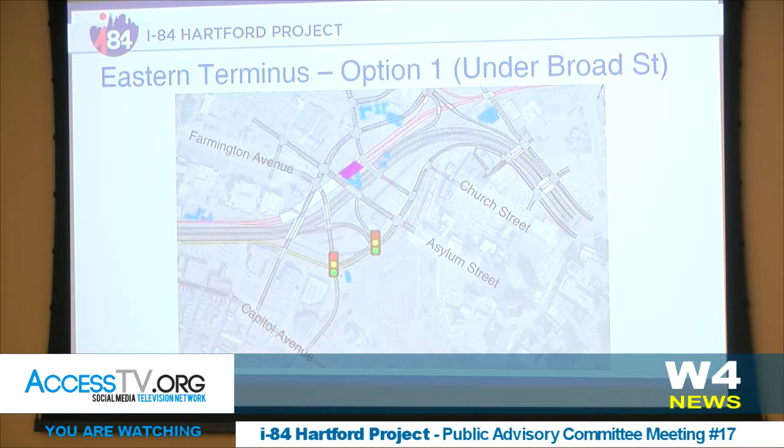So one option we've developed would take the guideway and pass it under Broad Street and then hook up with our new Bushnell Park West. We'd still have those Capitol Avenue routes, we'd still have the Farmington routes. With the Farmington extension, we're envisioning they would use Asylum Place and then continue down Asylum. Those could be well served to be the primary routes that stop right at that rail station.

As we think about the guideway itself, it would come through here. We're continuing to evaluate the potential impacts to the current infrastructure. We aren't pushing anything closer than previously illustrated, but there's still some concern about potential impacts to parking spaces we'll continue to evaluate as a team. It would pass underneath Broad Street and then intersect and terminate at the Farmington extension and that Road A, that Bushnell Park West.

Under this scenario, we would not be able to provide that Road B we've talked about as a local street; this would be dedicated to the busway. So the routes would come to that intersection, leave the dedicated guideway, follow up Bushnell Park West, and turn right at Asylum to circulate the central business district as they do today. So that's one option.

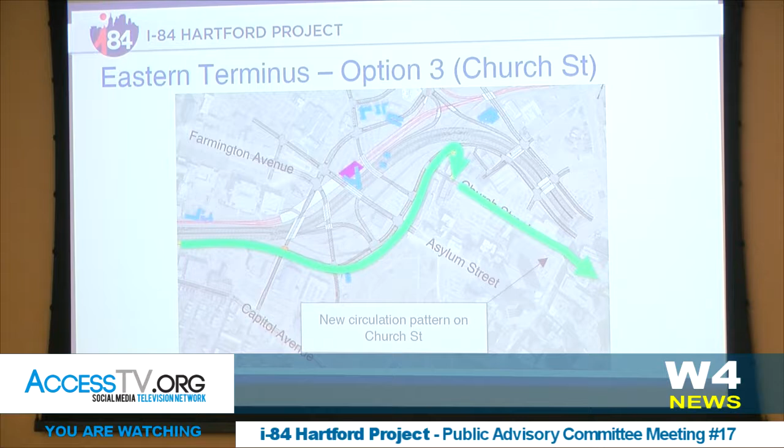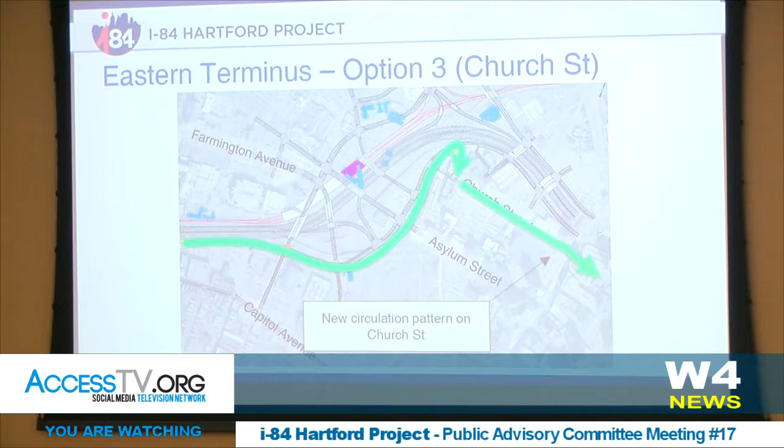But ultimately, that would be a new circulation pattern downtown, and we're cognizant of the fact that could raise some issues with folks along the existing routes where buses stop today. In addition to those changes, we're also considering the potential cost implications of needing to rehabilitate that rail viaduct. There are some estimates out there ranging from 50 to 100 million in terms of cost. Right now that's a facility owned and maintained by Amtrak, so it's something DOT would have to take on. It's certainly something we're cognizant of and continuing to evaluate as we move forward.

So, essentially we feel like we've hit on this idea of a new crossing location near Laurel Street. It's less expensive than the prior concept, and would allow the busway to remain in operation during the majority of construction. We're going to continue to analyze and look at how those Sigourney Street stations would function, as well as how we terminate the guideway. Ultimately, we're looking to document a preferred alignment, which could be in that level 3 screening process we've talked about. So you don't have to listen to me anymore.

I'm going to have Christine come up.

I know we've had a full meeting, so I'll be as brief as I can, but I just wanted to give you an update on where we are with the environmental impact statement. As most of you know, we are pretty well into developing the DEIS. The DEIS has a lot of different components and elements, but there are four technical reports that really drive the major issues within the DEIS.

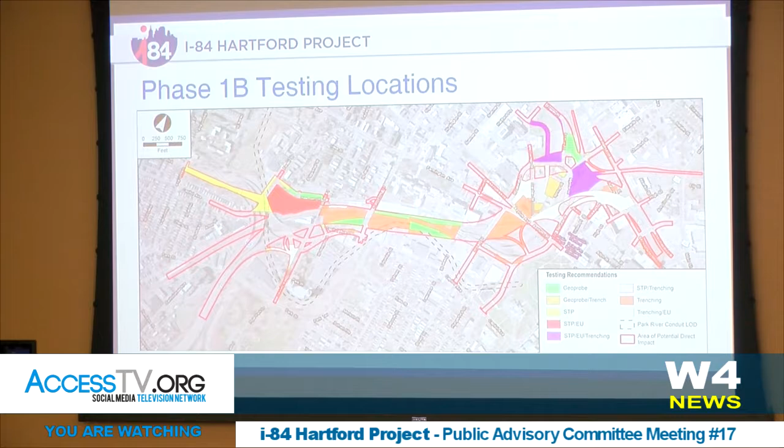This is just an illustration showing through the corridor where we're going to be doing the various types of archaeological investigation. And these findings, the results that come out of this investigation will all be included in the draft environmental impact statement. In terms of the air quality technical report, that was done in January.

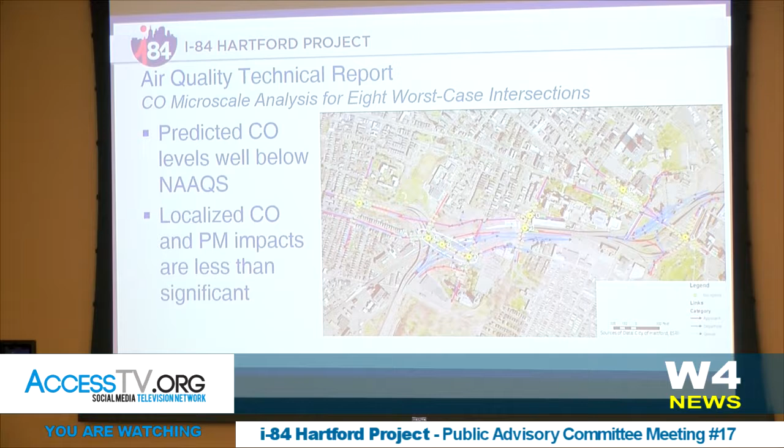Some of you have probably had a chance to look at that. We did a carbon monoxide microscale analysis, which looked at 8 worst-case intersections in the study area to determine whether or not emissions exceeded national air quality standards, and there were no exceedances of national air quality standards for future build conditions. We also did a mobile source air toxics analysis, which looks at 9 different air toxics and how the emissions will affect those 9 toxics.

What we found is if you look at 2040 build conditions compared to existing conditions, there's a 70 to 99% reduction in emissions depending on whatever pollutant we're talking about. Similarly, if you compare 2040 build conditions to 2040 no build conditions, there's a 9 to 18% reduction in emissions.

And the reason we're seeing this reduction in emissions is because you've got improved level of service, reduced congestion, reduced vehicle miles traveled, and cleaner burning vehicles. In terms of temporary impacts, there are going to be temporary air quality impacts during construction, and you'll see a qualitative discussion of that in the technical report.

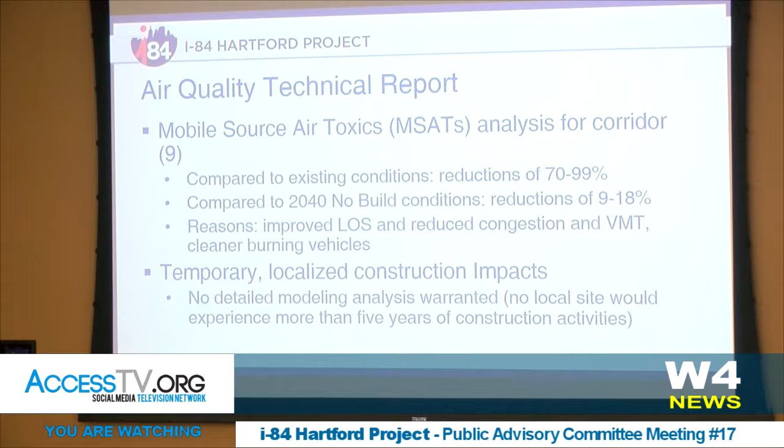The noise and vibration technical report looked at the noise generated from the highway using FHWA's traffic noise model. We also looked at noise and vibration from the rail component based on FTA's noise and vibration guidelines.

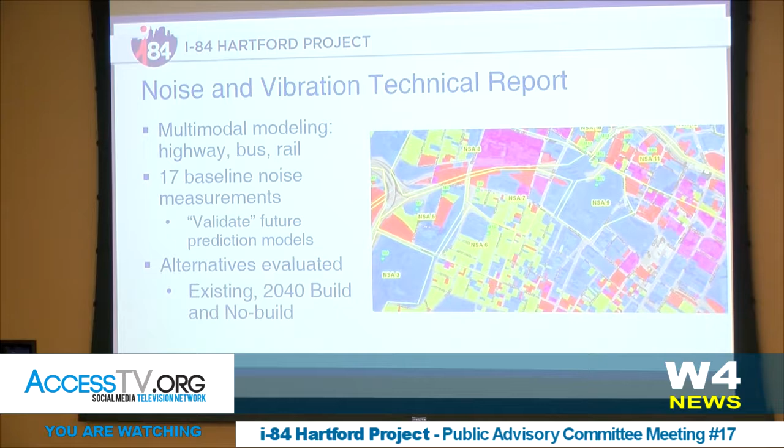We looked at 17 baseline noise measurement areas, which you can see here outlined in yellow on this map. We actually did monitoring in those locations so that we could validate the future prediction models. And we evaluated existing conditions, 2040 build and 2040 no build conditions.

What we found basically with the lowered alternative is that lowering the highway, and especially in those areas where it's depressed or slightly depressed, the cut acts as a shield, a noise shield to the sensitive receptors nearby.

The highway and the local streets are generating most of the noise out there, and we evaluated that based on the traffic noise model. We identified locations where we analyzed noise barriers and the effect of noise barriers. We had to look at Connecticut DOT's feasible and reasonable criteria to determine whether or not they were warranted, and we came up with a recommendation that out of those 10, one noise barrier was deemed reasonable and feasible.

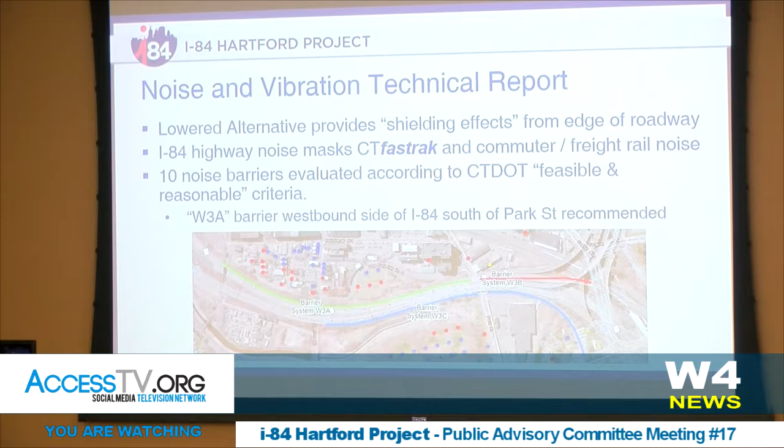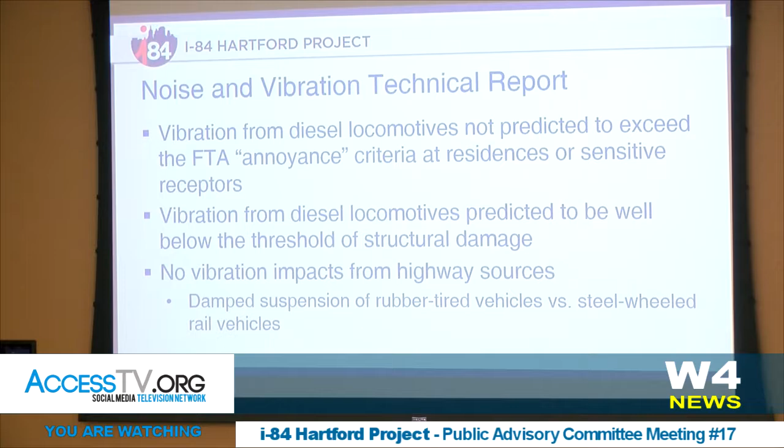In terms of vibration, particularly due to the slow speed of the trains running through the area, there are really no vibration-related impacts. The vibration from diesel locomotives is not predicted to exceed the FTA annoyance level, and similarly, it doesn't exceed the threshold for structural damage.

Land use and socioeconomic technical report. Again, this hasn't been seen by anybody yet. We're going to be submitting that to DOT early April for their review. But this basically looks at the affected environment, the impacts and the mitigation to the community resources, demographics, environmental justice populations.

I think one of the takeaways and points of interest in that document is it's going to identify the residential and commercial displacements generated by the project, and it's going to include a relocation plan that identifies potential areas for relocation housing and how we're going to handle that, because there are quite a few residential impacts where people are going to be displaced. So that's a document where you're going to see the preliminary findings of how that's going to work out.

In terms of the overall DEIS schedule, about early 2019 is when you folks will be seeing the draft environmental impact statement. Around this time next year, we'll be having a public hearing on the DEIS, and then we'll be gearing up for our final EIS and our record of decision in the summer of 2020.

So I know that was a lot of information in a little bit of time, but any questions? Yes? The relocation that you're talking about, is that to existing housing or the creation of new housing?

That is identifying the existing housing that is going to be displaced and how we might relocate them and where we might relocate them. It is a plan to replace the housing that's being taken down, yes. Building new housing, we don't know yet. I mean, it'll be in the plan.